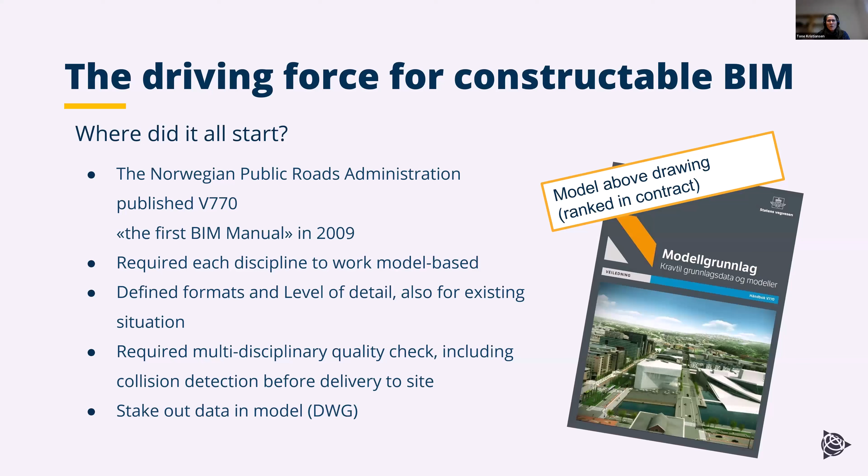Now, after the Road Administration published this model-based handbook, Bane NOR, which is the rail department, followed closely after, describing their own, and Nye Veier, which came about in 2015, who are in charge of very large projects here in Norway, also further pushed the requirements. And what is extraordinary about this is that they rank the model above drawing. It means that the drawing is secondary, but the model is required.

Another thing I think is very unique about the Norway way of doing things is the way they run their projects. They use a lot of design and build projects and PPP, public-private partnerships. This requires everyone to work with an open book, be transparent about how they do things. They combine the experience of the construction and the theoretical designers, and they sit together and form how they're going to have more constructible models, resulting in good design and better roads.

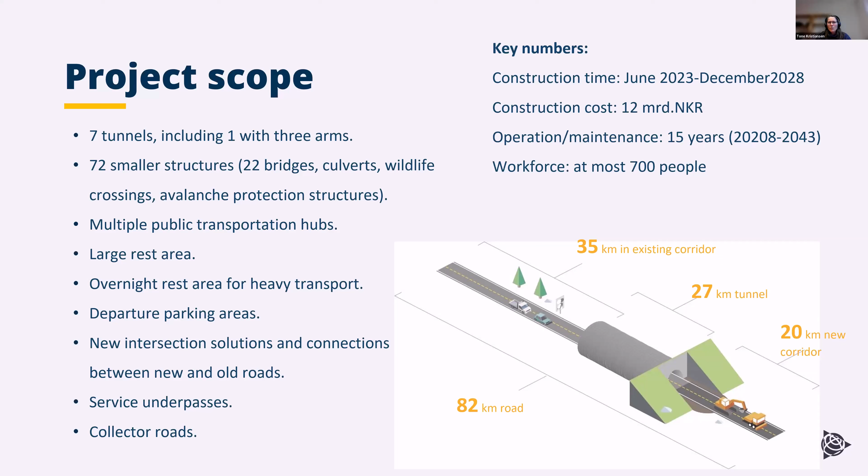You've got 35 kilometers going through existing corridor, 20 kilometers in new corridor, 27 kilometers of tunnel, completing the whole of 82 kilometers of road. That's how big this project is. So this is just a few images at different times of the year from the site, just to see how beautiful the scenery is as well.

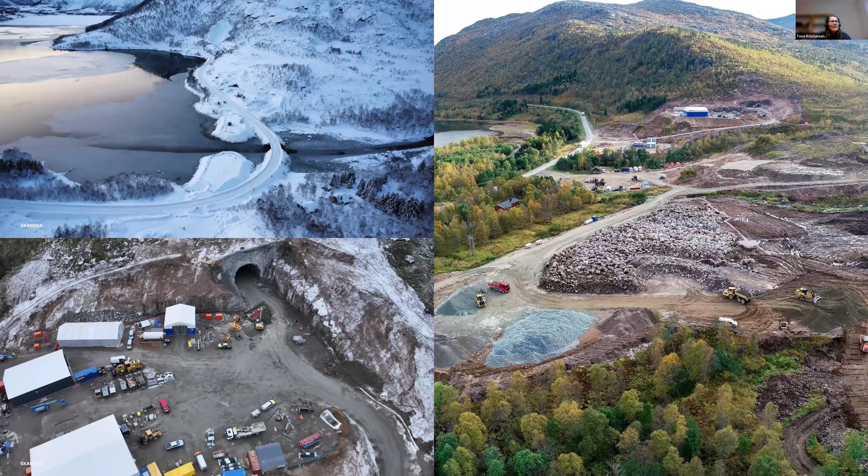Now, taking on a large project like this, you see a couple of challenges and solutions that you need to align for. You need to manage the size and the scale of the project and all the information required. You need to deliver good design solutions out on site. You need a fast and effective approval process. You need a system that can cater for large data sets. And you need to maintain and control the climate and sustainability.

So you need to align the digital requirements and ambitions as well. How are we going to work model-based? How can we measure production? What kind of tools do we need? How do we facilitate data flow the best possible way out to the people in the project, both designers and the ones that are going to be building this large thing?

Now, where it all starts is that we sit down and we draw this map. It looks quite big, but it allows us to connect all the different tools. What do we need to do for issue management? How are we going to access models? What does the design need? What does the contractor out in the field need?

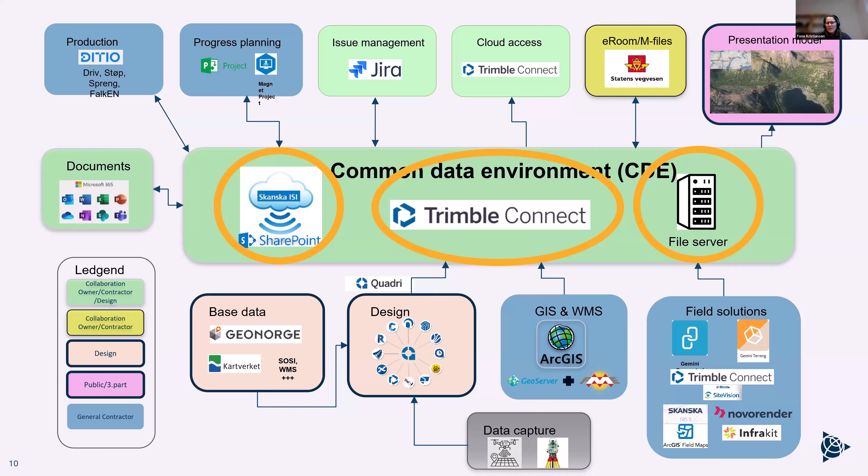So in general, the data flow is from Quadri to the file server and vice versa. And it goes into Trimble Connect. And then you've got the issue management via Jira. It's also connected to Trimble Connect.

So we use Trimble Connect Sync that uploads all different files from the file server every 15 minutes. We try and do as many automated processes as we can in order to get this whole ecosystem to function.

We use the SharePoint for training, information, documents, and deliverables. This is where data capture from site goes into, and you've got the daily digest from the construction sites, so you can read about what's going on.

You've got all the BIM documents located here, and you've also got your training and onboarding facilities. And through the SharePoint, you can also access Trimble Connect and the different views and the map solutions out on field.

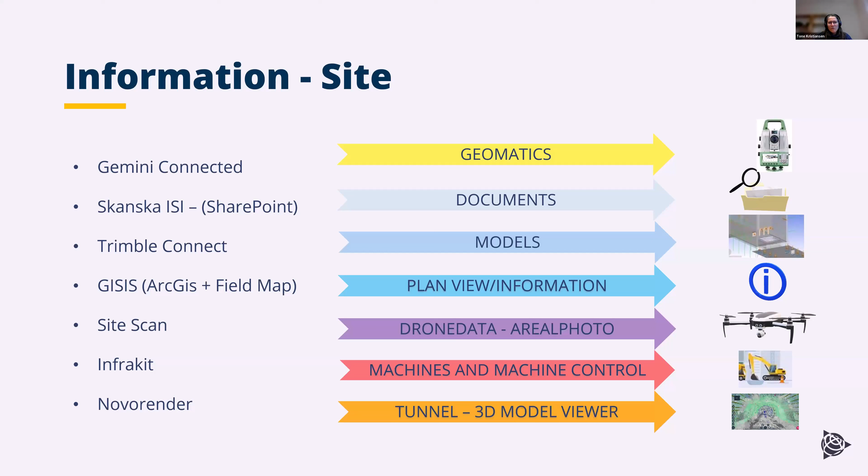We've got the system, the CDE, the common data environment, and we need to have documentation that kind of explains how we work, how we use these systems, and how we implement model-based design and utilize it. So in general, we create a number of BIM documents to validate how we work.

You define the BIM ambition and implementation as a document. You describe the methodology and the common approach. You state what kind of information is required and the format to be delivered in. And the disciplines each have their own attachment that describes how the different disciplines are structured and the format, and it also describes the workflow and the process.

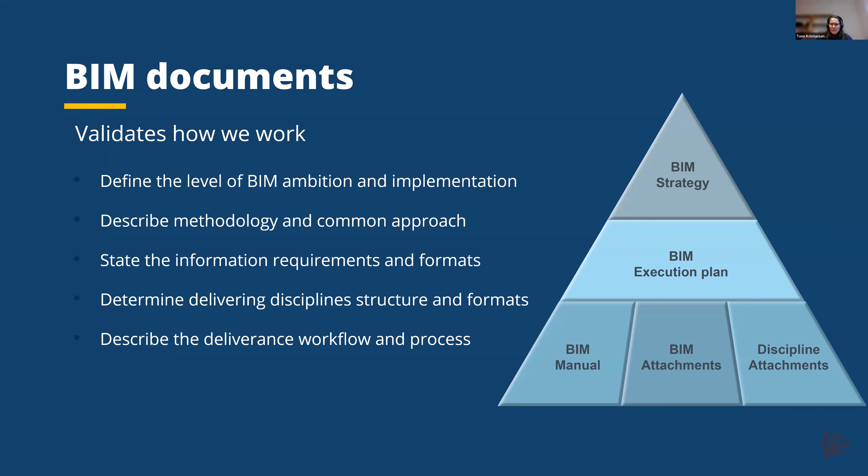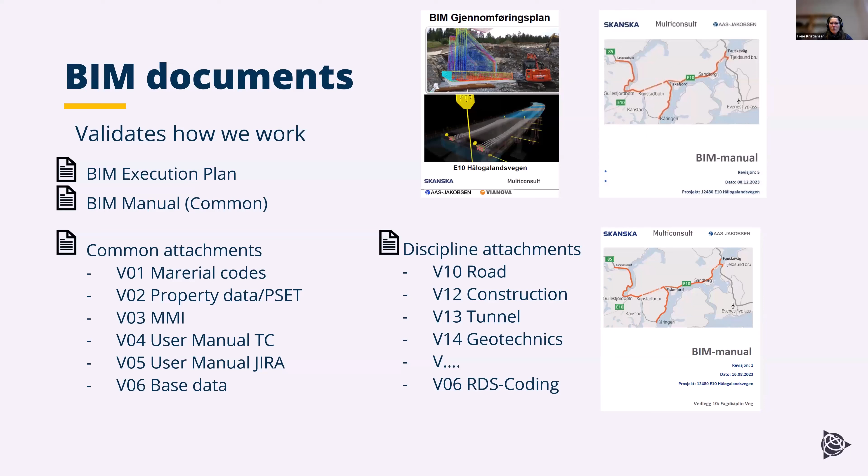So these are the documents that we have in this example project, where you've got the execution plan, the common BIM manual. Then you've got different attachments that are common to all disciplines and everyone. And then you've got the discipline attachments describing what road is going to deliver and how it's going to be delivered, what kind of information you'll find there, and what kind of survey data you will find there.

Now, these BIM manuals and attachments are all centrally located on the SharePoint and are accessible by all parties. So you can see there's a few pictures of different documents here. We can see from the SharePoint, and then we have a picture of all the different attributes and property sets that they will find in the different design models.

And then you have a picture of what we call the MMI, the Model Maturity Index, which is basically the same as level of detail, which defines the different stages and the commitments done for each stage in order to be ready for being delivered out on site and being built.

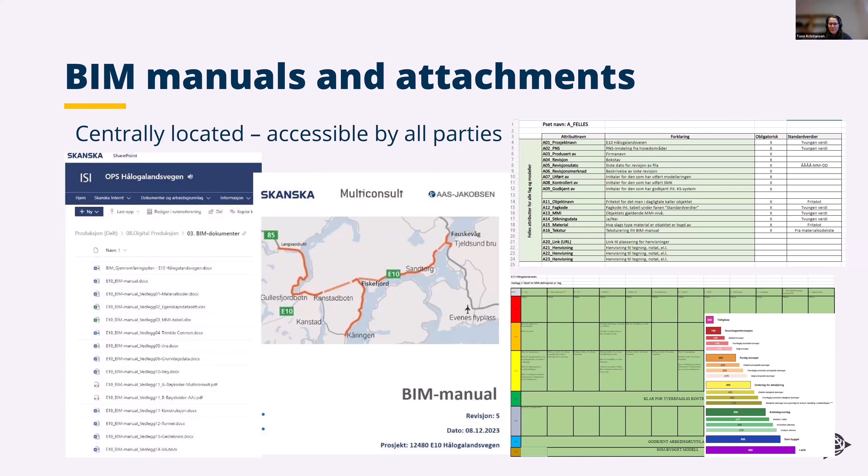Now, this is an example of a discipline attachment, in Norwegian — I guess some of you can read Norwegian anyway — where you can see what this discipline is going to deliver of survey data. Now, this document here is revised a couple of times according to construction feedback, because they find that they would love to have something else delivered or in a different way. So it's being revised and then changed, so things will be more efficient and more constructible out on site.

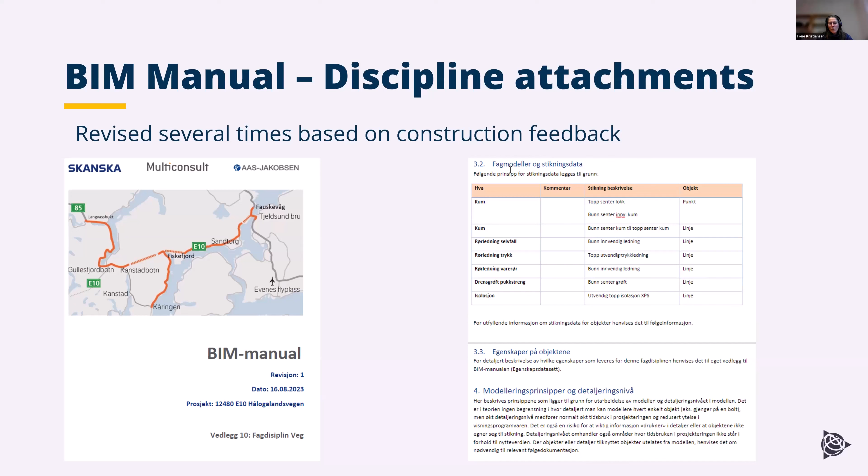And just to give you an example of a delivered electrical model down in the right-hand corner: in the discipline attachment, they distinguish between the base model, what you'll find there, and what you will find in a discipline model.

Now, this project you saw was very, very large, 82 kilometers, and we need to think clearly about how you name all your different files. So they've broken down the whole project into different WBS, work breakdown structures. So they get a number for each sector, and then the file naming of the discipline models and the base models describes what work breakdown structure this model is part of.

And then we deliver more or less everything in the IFC format because it handles geometry and properties. We primarily use the 2x3 version, and for constructions, they use a variation of 4. We do not use 4.3 yet. There are some exceptions from the IFC format.

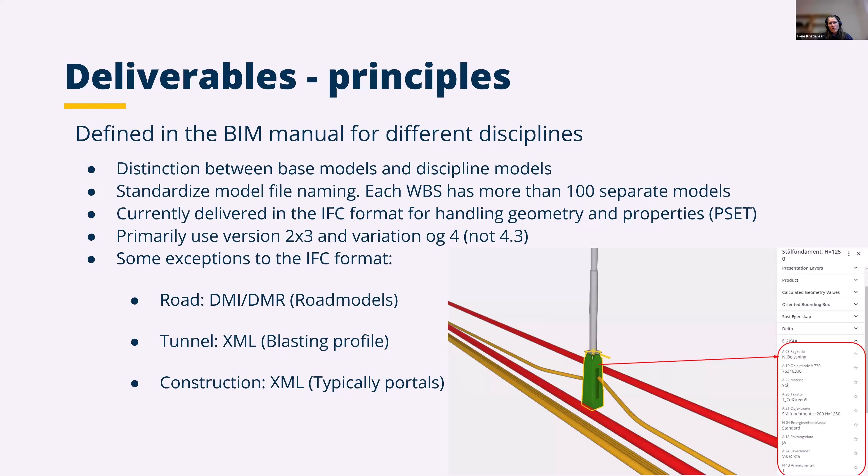Now, success factors, how we see it. Technology and information is very, very important, but most of all, it's important to have good communication and good training. Now, the contractor has its own BIM people, and the consultant also has our own BIM people. And we form a common BIM team, more or less at the start of the project.

We do that to get a common arena for coordinating issues regarding information, regarding things that happen on site, what type to deliver, what they actually need out on site. So this is an arena for us to collaborate. We have joint meetings with the client as well every fortnight.

We do the onboarding and have a dedicated place on SharePoint where all the onboarding and training facilities are accessible. We do regular webinars, which we call training breakfast. Everything in order to have an easy place for the people out on site and the people that are going to access models, to train them in how to use the tools.

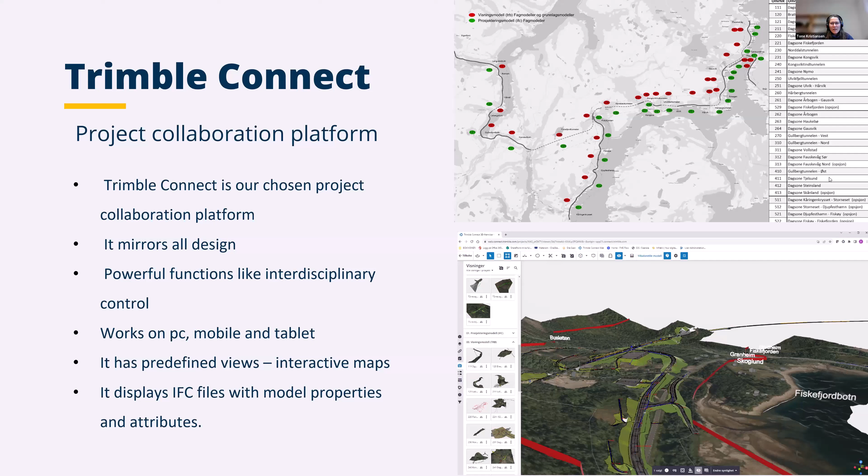And what we regard as the success factors are the naming of files, that you have a good structure based on the work breakdown structure. For each sector or work breakdown area, you have a number that aligns with the sector it belongs to. And for each sector, you have hundreds of files. And for each sector, we create a view.

It's got a folder structure, which also describes the WBS structure. You have good access management for the different areas, who needs to see what. And for managing all the views, we use these interactive maps. We also have drone data inside Trimble Connect, so you can see the actual drone laser files together with the design data.

And we also have a lot of symbols being used for linking information, and information boards, all to cater for the people that are going to use the models to construct.

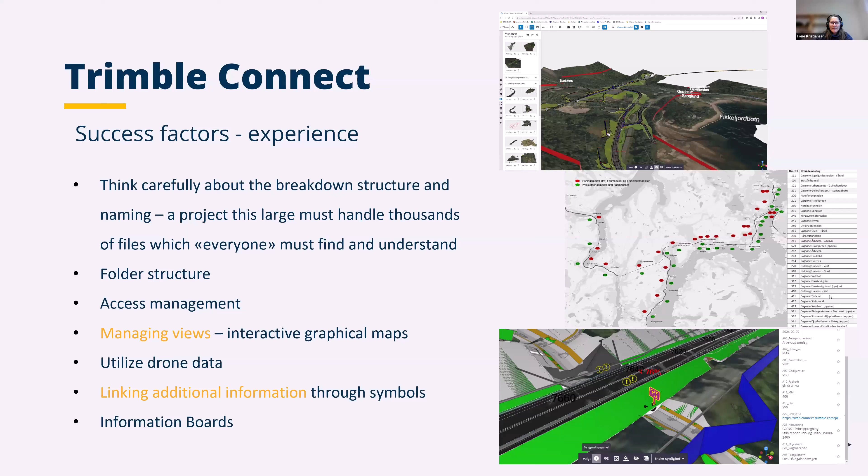We have approximately 900 users, and I hope the picture is big enough to see the marking on how many views there have been created. So in order to have an easy point of access for the people that are going to use it, we have made interactive maps of different types of views.

So you have a map in the background, and you've got the different WBS zones. We have views for all models that have been delivered, for presentation models and production models. So normally a user would open up the interactive map and then just click on the different colored dots, and the view for this area will show.

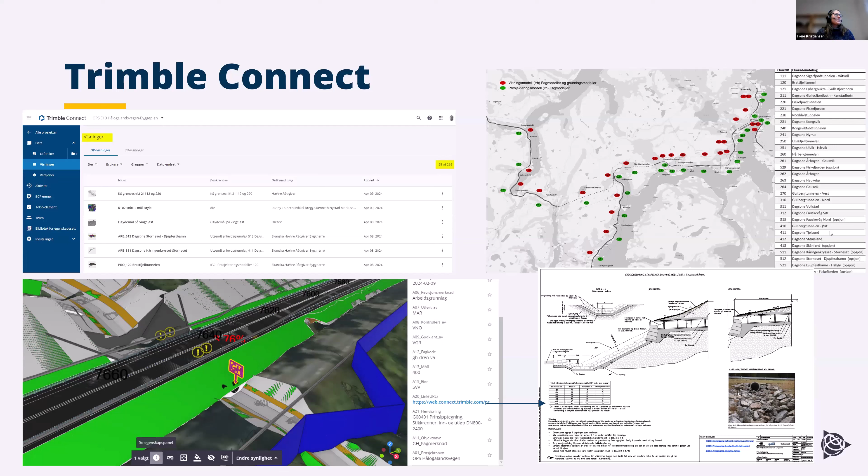Another part that the people out on the site really like is the linking of information by using symbols or information boards. So clicking on the information board will take you to a link, and you can get further information. As an example, a principle drawing of how to do this one open section ditch. I'll show you just an example of one of the boards.

Another application that the construction site uses is the project footprint. We also constantly deliver information to the construction for the actual footprint of the whole project, so they can maintain and overlook the climate control.

So in short, these are what we see as the success factors. By utilizing all these different tools and this CDE, common data environment, we minimize the use of traditional drawings. You still need to have some drawings, but it's vastly reduced. This way of working makes sure that the contractor and everyone involved uses models as much as possible.

They get fast and accurate information from these models based on the communication on what the construction needs and what we can deliver. They build right the first time because they are so involved in the process. They get a faster and better understanding of what is needed to be built.